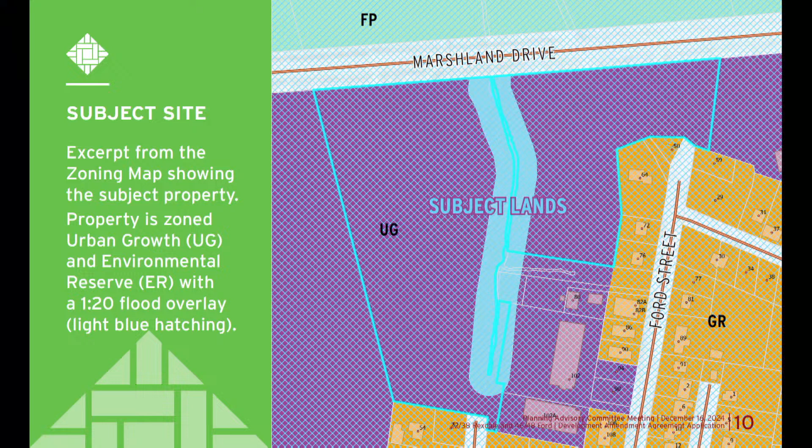This is an excerpt from the town's future policy area map, showing the lands are within the urban growth policy area designation. An excerpt from the zoning map shows the property is zoned urban growth and environmental reserve - purple for urban growth, blue for environmental reserve around a watercourse. The hatching over the property indicates it is entirely within the 1 in 20 flood overlay, shown in light blue.

In terms of the development proposal, this is a site plan showing the proposed development consisting of 4 buildings. Two of these would be 6-story buildings - this one here and another over here - and then there are 2 4-story buildings as well.

There is no vehicle access proposed from Marshland Drive, which runs across the top of the screen. All vehicle access would either be from Ford Street or Rexdale, with no internal circulation between the two properties. This is a conceptual rendering submitted by the developer.

The buildings are situated in 2 groups: buildings A and B would be closest to Park Street, and buildings C and D would be closer to Rexdale Drive. The applicant has positioned the 2 six-story buildings, A and C, to the north of the site, away from existing residential development on Ford, although closer to Cross Street.

The other building is over closer to Rexdale Drive, but pushed further to the north, closer to Marshland. This is a highly idealized landscaping rendering showing some mature trees around the subject property.

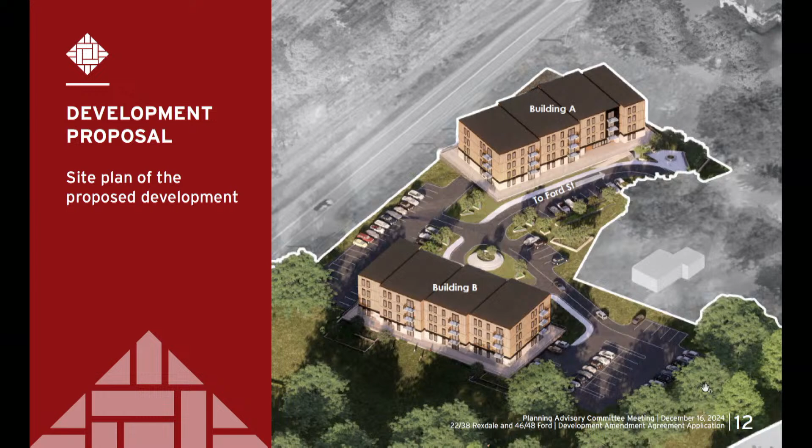The landscaping details will be subject to review by the town's urban forestry technician, and any draft development agreement would encourage that a landscaping plan and tree planting and retention plan be developed in consultation with the urban forestry technician.

Here's another rendering showing buildings C and D. These are the ones closer to Rexdale.

The development includes a mixture of surface parking and grade level interior parking. There's no below grade parking, but the first floor of buildings A and B would be occupied by structured parking, and the rest of the parking would be situated at grade surrounding the developments.

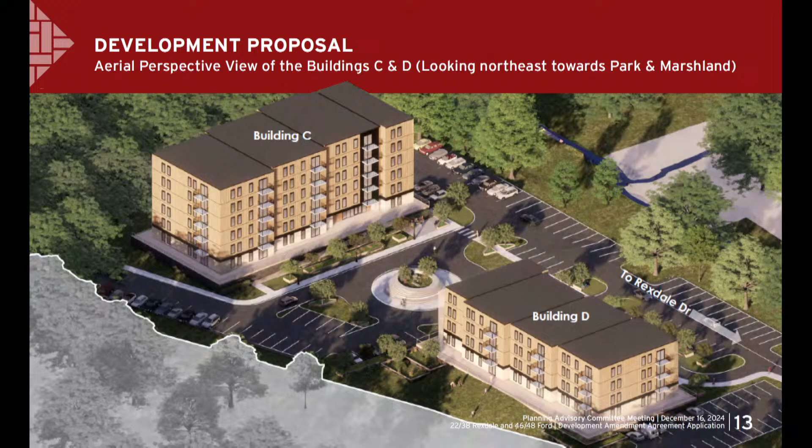There's surface parking for 100 vehicles for buildings A and B, plus an additional 24 spaces on the ground floor of each building, working out to a ratio of around 1.56 to 1.74 spaces per unit. Buildings C and D have surface parking for 122 vehicles, a ratio of around 1.28 to 1.44 spaces per unit. This development will have a total of 270 spaces with a parking ratio of between 1.42 and 1.56 spaces per unit.

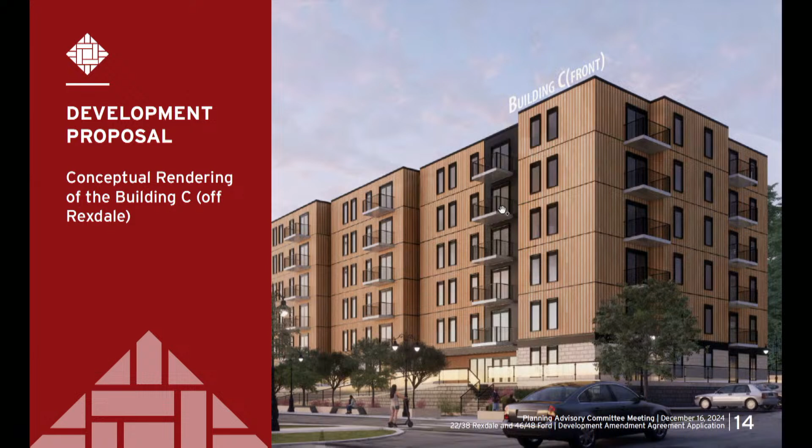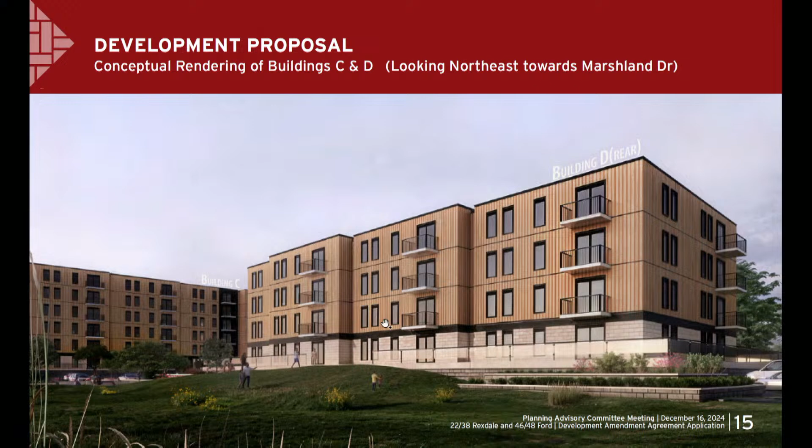This is a conceptual rendering, a little closer, of one of the proposed buildings. This is building C off Rexdale, and this is just a view of building C and D. Building C is in the background, the 6-story building, and you can see the 4-story building in the front. This would be looking northeast towards Marshland Drive.

Just some detailed site plans. The proposal does include preliminary site grading and drainage plans prepared by a licensed professional engineer. The engineer has confirmed that the site will be designed to conform to the town's floodproofing, flood mitigation, and stormwater management requirements.

The development agreement will require that these plans be prepared by a professional engineer and approved by the town engineer's office before the town enters into an agreement. That's the staff recommendation, that this be a condition of any approval, that these plans be signed off on and approved by the town engineer's office first.

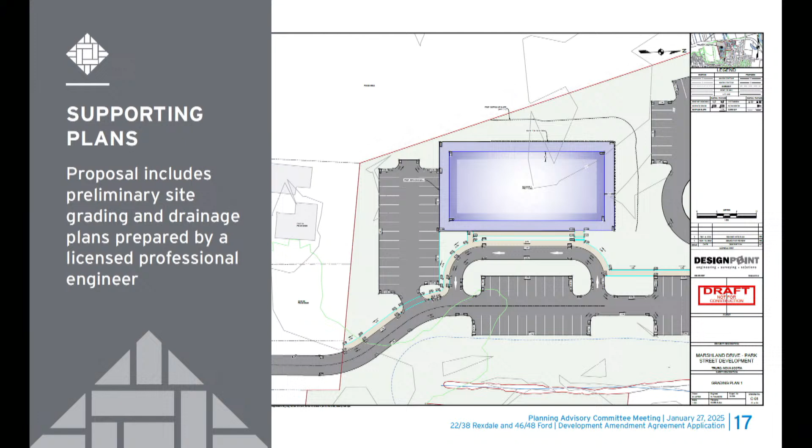In terms of policy analysis and review, this is the enabling policy that allows council to consider this application: policy UG 35. It states it shall be a policy of council to consider any multi-unit development with more than 18 units by development agreement, and it refers to the criteria set out in chapter 14 of the municipal planning strategy, which is implementation. That forms the basis of the review conducted by staff.

Planning staff have reviewed the proposal based on the applicable policies found in the town's planning documents. Potential issues with policy compliance will be discussed on the following slides, including the need for additional information such as a stormwater management, drainage, and flood risk mitigation plan, servicing plans, and a traffic impact study. There are also potential concerns about building height, and about the proposed mixture of dwelling types and uses, or in this case, the lack of a mixture of uses.

Staff have reviewed the proposal based on the policies found in the town's planning documents. Again, the issues of compliance discussed in the following slides include the need for servicing plans, the traffic impact study, the need for stormwater management, concerns about building height, and the proposed mixture of dwelling types and uses.

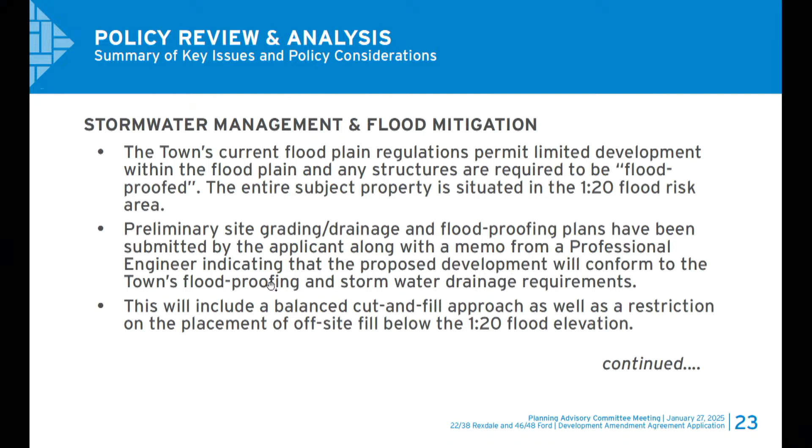This will include a balanced cut and fill approach, as well as restriction on the placement of off-site fill below the 1 in 20 flood elevation.

Staff are recommending that the town not enter into a development agreement to permit the proposed development until the applicant has submitted plans prepared by a professional engineer, and that these be approved by the town engineer's office prior to entering into any agreement. These plans must demonstrate how the development will be flood-proofed in accordance with the town's requirements, and confirm that this development will not contribute to upstream or downstream flooding or result in a change in flood flow patterns.

Building height was another potential concern identified by staff as part of the review, based on the town's planning policies. The proposed 6- and 4-story buildings are situated in a residential area of town where existing development is typically 1 to 3 stories in height.

Building A exceeds the applicable height requirements of the UG zone, or urban growth zone, and may have a negative impact on the neighboring properties within the general residential policy area. The UG zone specifies that the maximum permitted height of a building has to be 0.75 times the distance the proposed structure is from a general residential zone, and Building A is situated approximately 21.5 meters from the nearest GR zone property on 64 Ford Street.

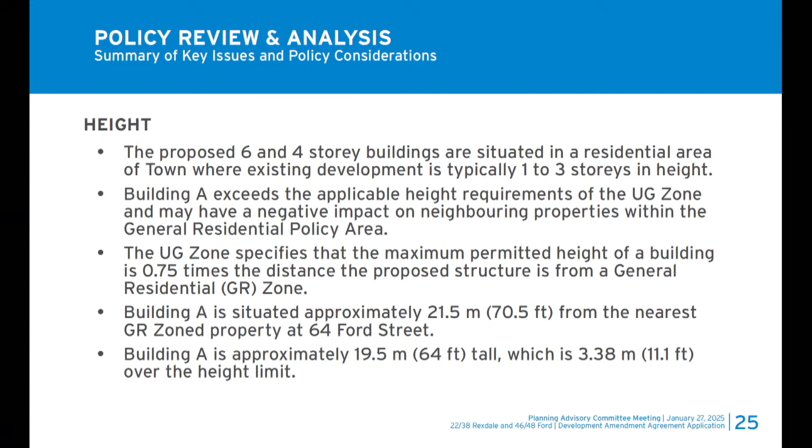So Building A is approximately—and these are all based on rough plans, so we haven't received detailed elevation drawings, these are all estimates by staff—but it looks like it's about 19.5 meters tall, which is about 3.38 meters over what would be the height limit prescribed by the urban growth zone.

The proposal also aligns with many of the town's planning policies, including increased residential densities around the downtown—that should say, new dwelling units on existing infrastructure.

So we're looking at, again, a site here that is serviceable. It's got services around it. There wouldn't be big extensions of municipal infrastructure required, so they're able to accommodate new residential density on existing infrastructure. For the most part, only a small extension to Ford Street would be required.

Also, there are policies dealing with walkable neighborhoods, and this would address that to some extent, providing new housing within a relatively short walking distance to many services and amenities.

So, review by other departments: on the 14th of January, we sent it out to a number of other agencies, including the town's urban forestry coordinator, the school board or regional center for education, the fire inspector, the building inspector, the town engineer's office, the traffic authority, the director of parks, recreation and culture, and the police chief. They were all forwarded details of the proposal and invited to provide any comments or concerns. Feedback received has highlighted the need for a detailed servicing plan.

So how the site will be serviced with municipal water and sewer, details on floodwater drainage, traffic impact study, and plans for fire department access, as well as private on-street hydrants and on-site hydrants. No other significant concerns were identified, and at the time this report was prepared, we were still waiting for comments back from the urban forestry coordinator.

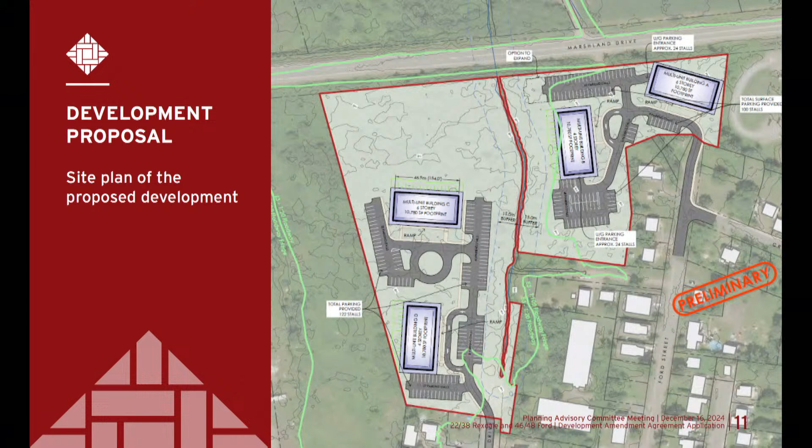Is that part of the risk assessment? No, again, I would be looking at this meeting our standard land use bylaw requirements. So if it meets those, I'm fine. The developer is probably going to have a concern about that level of change - I would expect that's going to increase their costs. So that's something that would have to be discussed with them, but it's not currently part of the proposal, and I don't know if it benefits the proposal in any way from a compliance with our bylaws. Right, okay, I'll leave it at that. Thank you.

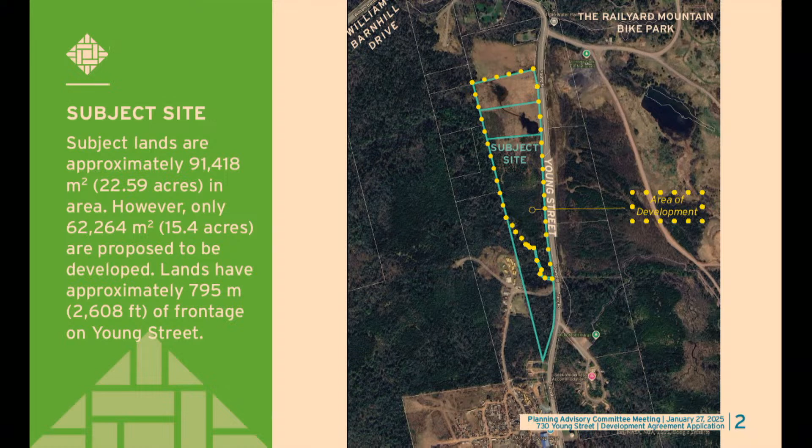Lands have approximately 795 meters of frontage on Young Street. Lands are within the future growth policy area. Multiple unit residential proposals with more than 50 units shall be considered by development agreement. They are also zoned future growth as well as environmental reserve and urban growth, and residential development with more than 18 units shall be considered by development agreement as per policy UG 35 of the town's land use bylaw.

Subject site, we have some exciting photos to see. So some of the land is cleared. I've done a little inset map for your reference to show where it was approximately taken.

This is an existing ponding area that's on the site along Young Street, part of the development. And here we have a treed section of the lands also to be developed.

As mentioned, this is step 1 of the application process. Staff are recommending the 5-step expanded evaluation process due to the size of the application.

This is a site plan of the proposed development, and you can see it's a rather large proposal. 276 dwelling units are proposed, split between 19 buildings, 3 of which are 4-story multi-units, and a mixture of stacked 2-story townhouses as well as regular 2-story townhouses.

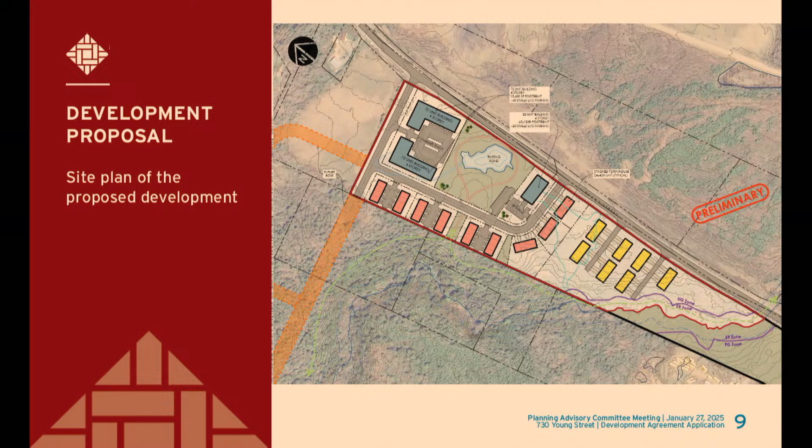Lot coverage for the entire site would be about 27%, which would include the buildings as well as the parking and paved areas. Thank you, Councillor Thomas, for bringing this to my attention earlier, but I did make a slight error in my parking calculations. It does appear that there will be at least 1 parking space per unit as proposed, but this may change and shift as the proposal goes through the evaluative criteria.

And we do have the developers here, the applicant is here, who may be able to speak to that in a little bit more detail, should the committee wish.

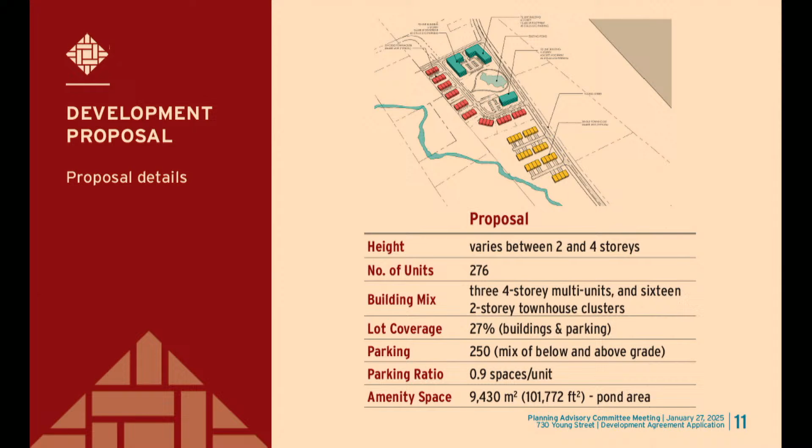Some amenity space is proposed as part of this development, shown here where the existing pond is, with a trail going around it as some amenity space. There may also be amenity space in the form of common rooms and common space within the multi-units, as well as balconies and backyard space. That will come out as it goes through the evaluation process.

As mentioned, the expanded 5-step process is recommended. Development application notice signs will be posted on the lands in the coming weeks, letting residents and the traveling public know the site is being considered for a development agreement. Information has already been posted on the town's website under active development applications, so please check that out if you have questions. A mail out will also be sent to property owners within 150 meters of the subject lands regarding the public hearing notification.

As next steps, this will be going forward in front of the Planning Advisory Committee at least twice more, for a second and third meeting. These will include the evolution and any changes the developer and applicant make to the submission and proposal. Those will be brought forward to the committee for consideration, with a full staff report at the third meeting, as we just witnessed with the other application prior to this one, as well as a final public hearing.

That concludes my presentation. Thank you, Madam Chair. Thank you, Ms. Connolly.

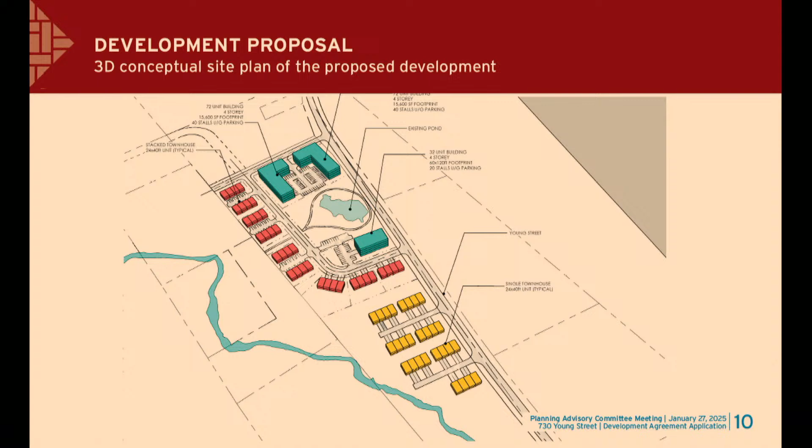Ideally, that's right, because I think that's very helpful for the overall economy of the country, the province, and even the town. If people have ownership of real estate, I think that's an important part of someone's personal portfolio. Definitely, yeah, we agree with that. I think that's a positive thing.

I'm just wondering about these parking lots, like the 61 unit parking lot. There's some restrictions on that, and I just want to make sure, we talked about that, but Ms. Connolly, we will ensure that some of those bylaws will be applied to that 61 so it's not just an expanse of asphalt. There'll be some landscaping in it to cool the area and make it more visually pleasing.

Correct. The town's bylaw is pretty clear. It has design standards for parking lots with over a certain number of spaces, so yes, those will be applied to this. Yeah, I would like that applied in this development agreement.

The other thing is just landscaping in general, it's just that these are like streets in many ways, right? And I like to see a streetscape there. The Urban Forest Committee has got some native and near native species, a list they can recommend to you. These species should do well under climate change, they're very nice and pest tolerant because they're more native. The idea is to make them more resilient, and I think that would really help the development.

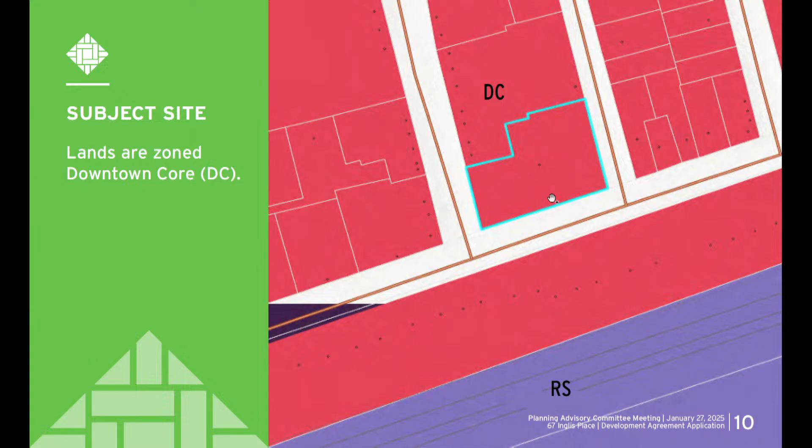That's really the only other detail at this time; other design elements haven't been finalized, but the upper floors do show 30 units, 3 bachelor, 15 one-bedroom, and 12 two-bedroom units. The site is approximately 46.5% lot coverage, and about 99% impermeable surface, but that's not a big change from what's there now, except that there's probably more green space being proposed, intended along the edges of the parking area. The proposal features a surface parking area for 21 vehicles, with a parking ratio of 0.7 spaces per dwelling unit, which meets the bylaw requirements.

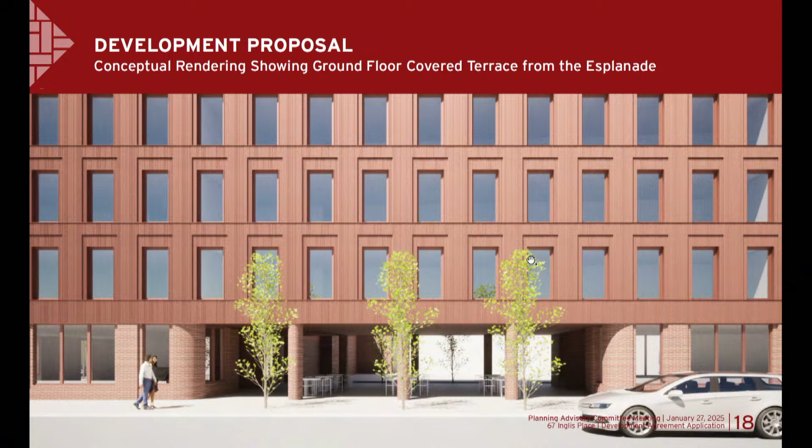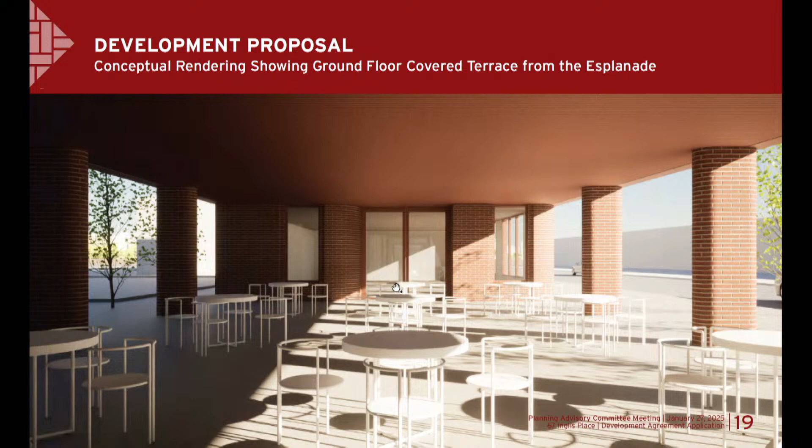And this is a view of the proposed covered terrace, which leads through into the parking lot and the Grow and Brew on the other side. And there's just some potential ideas about how the space might be used, if there's an abutting use that's a coffee shop or a restaurant or food service of some sort that might utilize that space.

And then this is the enabling policy, DC 74, which just talks about having multiple units being considered by development agreement, subject to the criteria found in Chapter 14, implementation, which we'll go over in detail at the next meeting.

The development application notice sign has been posted on the subject properties. Information on the town's website under active development applications will be updated, and we will do a mail out to the property owners following this meeting, those within 150 meters of the site.

So as I mentioned, we're at step 2. At this point, members are expected to provide further direction to the developer regarding suggested changes to address public feedback and to better conform to the town's planning policies and objectives. Also at this meeting, the applicant may commit to additional changes to address feedback and better conform to those policies. And once we've settled on a conceptual design, the application will proceed to step 3.

When we'll actually conduct that online survey, prepare a staff report and recommendation, and the results of the survey along with the staff report will go to that 3rd meeting, tentatively scheduled for the 24th of February. After that, the committee would make its recommendation and would proceed, presumably, to a public hearing in April. And that concludes my report.

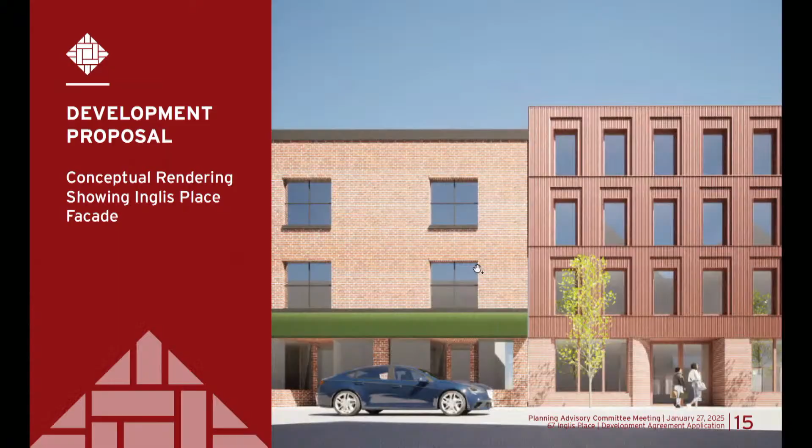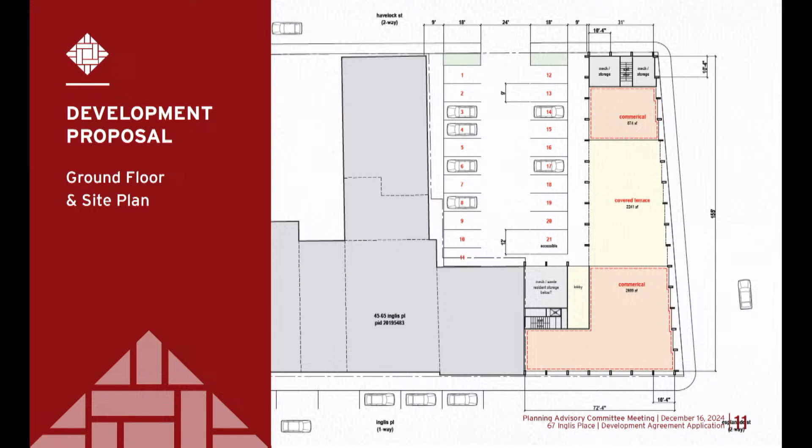Oh, for sure. Okay, that's a wonderful thing, and that's sort of some of the details that I'm looking for. Because I will say, you've been here this whole meeting, bless you for that. This came across as a very detailed first plan, one of the more detailed first plans that I've seen so far. But I guess I was just looking for something a little more. So that would be my request. If I have to make it an actual directive, I guess, it would be to see more details on the things that we've discussed.

You know, what are we doing? Are we doing these bathrooms? Are we doing the amenity rooftops?

What kind of grade separation are we doing? You mentioned a curb, Mr. Rogan. But I see a lot of people parked on sidewalks. I don't consider a standard curb as sufficient separation.

Yeah, I could speak to that. In one of the meetings I was present for, especially on the Esplanade side, it was considered something more robust than an 8-inch curb, something architectural that goes with the building's facade. But there wouldn't be anything there any different than any other building on any street in Truro.

Right, well, I agree with that, I take that point, but not every other building in Truro has a covered terrace that somebody might want to try to shortcut through. I'll use this example of a drunk driver who tried to make a turn and ended up inside my neighbor's house.

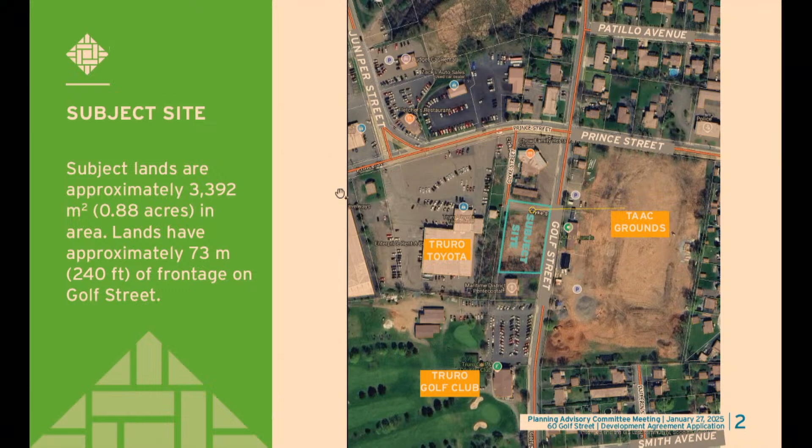Thank you, Madam Chair. Subject site is at 60 Golf Street. You can see here on the inset map the subject site is there. The TAAC grounds under renovation from the aerial photo on the right, Truro Golf Club for context, so it's Golf and Prince Street near that intersection. Site is approximately 0.88 of an acre with approximately 73 meters of frontage on Golf Street.

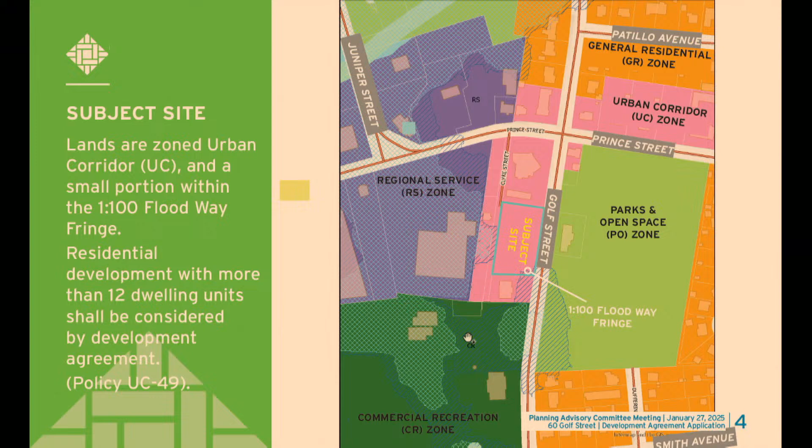Lands are within the regional service policy area, and multiple unit residential proposals with more than 18 dwelling units shall be considered by development agreement as per policy RS 36 of the municipal planning strategy. Lands are zoned urban corridor UC, with a small portion within the 1 to 100 floodway fringe, in that low southern corner. Residential development with more than 12 dwelling units shall be considered by development agreement as per policy UC 49, again of the municipal planning strategy.

Subject site, you can see, has been cleared. Some members may remember this site has been in front of the committee a couple times in different iterations, this being the most recent. So the site has been cleared probably since the last time you've seen it. This gives you a little bit of context for the site.

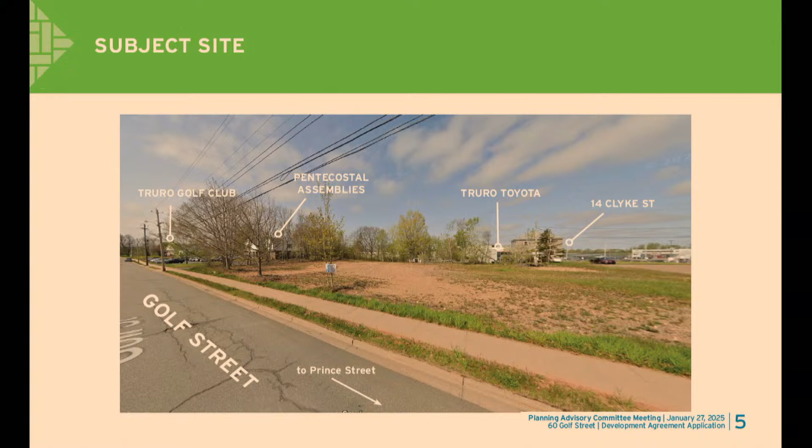This is taken on Golf Street facing the golf course, and this is taken on Golf Street facing Prince Street. Again this application is a new one, so it's at step 1. Staff are recommending the expanded process be used to consider this development. The proposal is an apartment building with 5 stories and 55 units total.

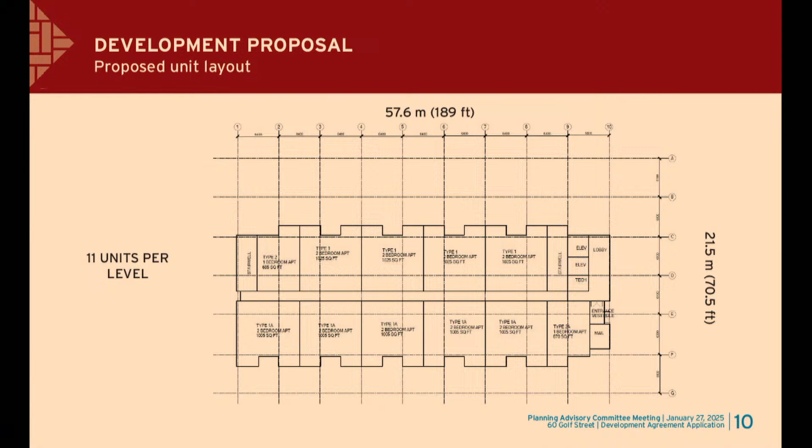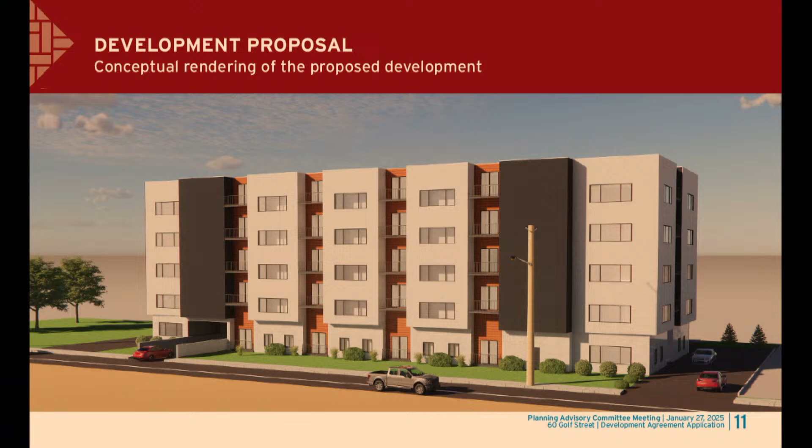Here we have a conceptual rendering of the proposed development. This is expected to evolve slightly as we go through the process, and this is what the applicant has submitted to date for the committee's consideration. So again, 5 stories, 55 units, 10 one-bedroom units total, and 45 two-bedroom units currently proposed.

37% lot coverage, that's just the building itself, but with the parking podium underneath, that's about 81% impermeable surface. Total number of parking spaces is 70, with 53 of those below grade and 17 in the rear portion on the surface. That gives us a ratio of 1.4 spaces per unit. We also have some amenity space proposed through balconies for each unit.

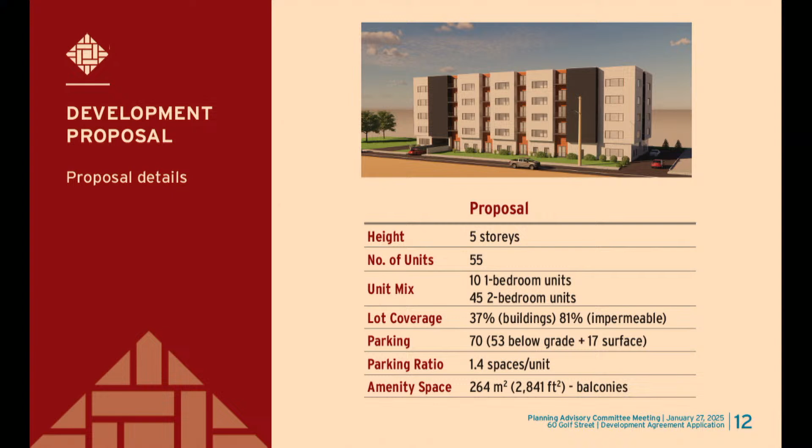And that's all that's currently been identified. Staff are recommending that 5-step expanded process. The updated development application notice will be placed on the subject lands in the coming weeks. This information is available on the town's website under active development applications, and a mail-out will be sent to all property owners within 150 meters prior to the public hearing. This will also come before the committee for a second and third time prior to going to a final public hearing, which would include that full policy staff report, balancing the town's policies against the proposal as submitted. That concludes my presentation. Thank you, Madam Chair.

Thank you, Ms. Connolly. I understand there is someone here representing the applicant. We have Mr. Wallace here. Please come on down. Hi, Mr. Wallace, if you could introduce yourself and your connection to the project. Dave Wallace, I'm with Tier 2 Properties. We purchased the property 2 years ago, and Tier 2 is also the owner of the Truro Hub Mall.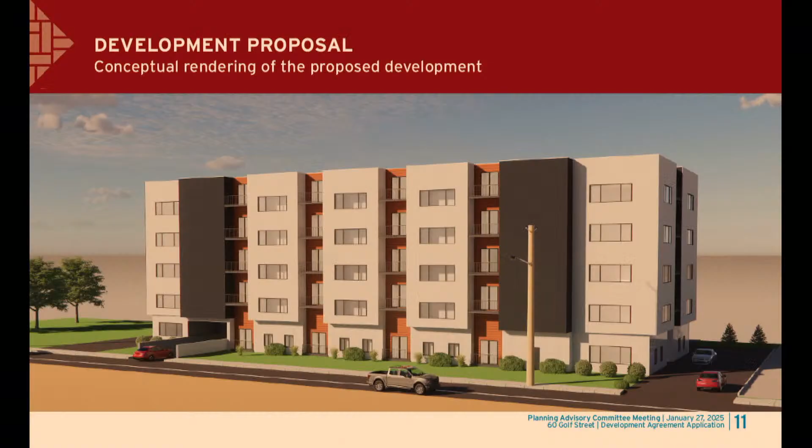The one thing that is a concrete comment is about the underground parkade and the building itself, where it's situated on the lot. I like the idea of having street trees of some sort, and I was wondering about its location, because the underground parkade is larger than the building, so you really can't grow trees over where that parkade is. Can you ensure the underground parkade is moved far enough from Golf Street to allow the planting of some trees along there?

One of the issues with the development agreement that PAC and council approved was there were 2 levels of underground parking. With the water table, it's almost impossible to get 2 levels underground, and it would be extremely costly, not worthwhile. So in order to have a sufficient parking ratio of 1.4 per unit, we decided to do a parking podium, hence what you see.

We can plant vegetation and low trees for sure, but the soil depth is not sufficient for larger trees, and we can't move the podium. That was a problem with the last proposal too, and it's going to be that way with this one. We're dealing with a lot that's 36,000 square feet - great location, but it's a small lot.

Thank you for your answers. Councillor McGrath. Thank you, Madam Chair. Good evening, Mr. Wallace. You mentioned that you have an existing development agreement. I'm not lucky enough to have been on council to have dealt with that one, but I understand from my history it was quite the discussion.

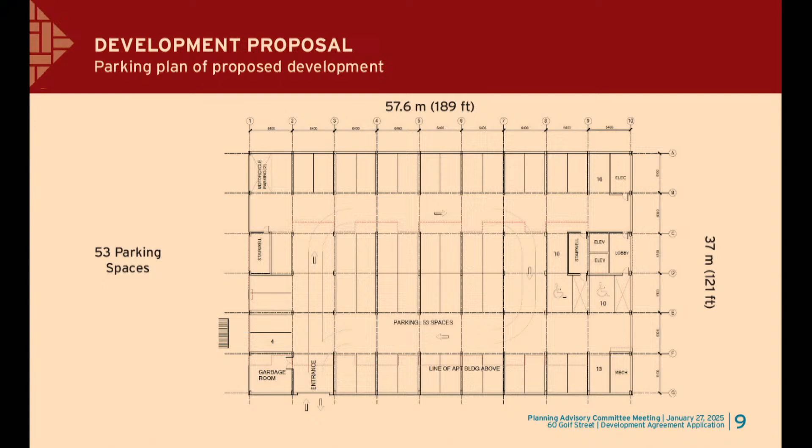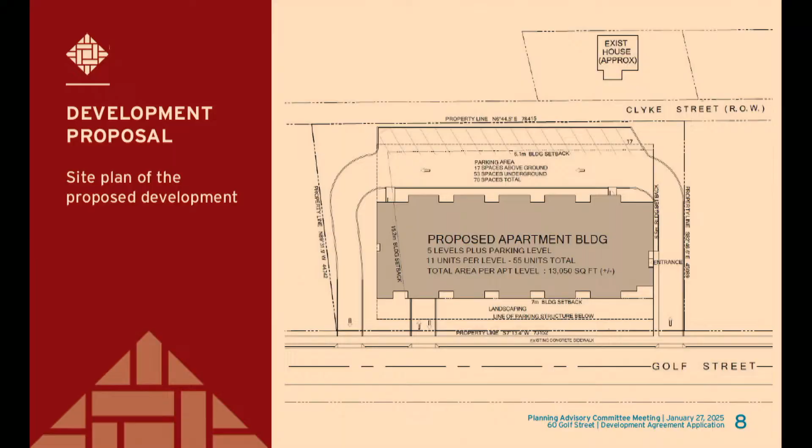I don't know. I'm just curious, because we talk a lot about affordability in the town, and I agree your clientele are likely golfers, football players, or track runners based on the location - well suited there for the golf course. I could see my parents moving in there, my dad's an avid golfer. But just about the affordability, and since you mentioned the high cost of underground parking, I wanted to get an idea of what we were looking at.

So thank you for that. A few issues came across in our review - the number of units on the existing development agreement, I think there were 67 units, and the majority were quite small. So that was an issue we had, hence we're going to 55 units now, reducing the number by 20%.

What was the other issue? Well, you've also reduced the footprint too. Yeah, it's smaller as well. But did the apartments get bigger? Some apartments got bigger, yes - the units are bigger overall on average.

For those who don't know about Tier 2 properties, our sister company is RCS Construction, one of the medium-sized construction companies, GCs, in Nova Scotia. So I'm fortunate to have a good idea of construction costs for our developments throughout the Maritimes. The cost to build the approved building from 2 years ago is just outrageous, so we had to look at cutting down construction costs. Because at the end of the day, real estate development is really about the cost of construction versus the cost of rent. So hence, these are the changes we're putting forward to you and hopefully council.